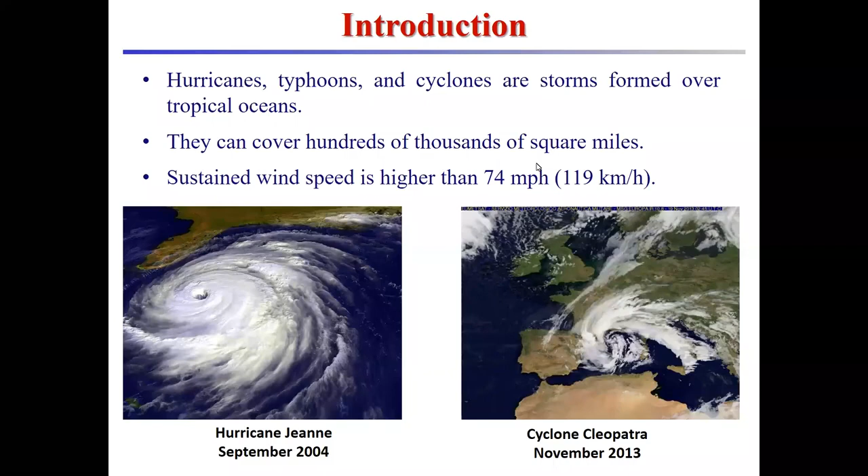Fundamentally, these are storms where the sustained wind speed is higher than 74 miles per hour or 119 kilometers per hour. How do these objects work? We really need to have warm ocean waters, in general with the temperature higher than 78 Fahrenheit, 26 Celsius. They need to be sufficiently north or south from the equator. They need to have a low vertical wind shear in the upper part of the atmosphere so that this cannot reduce the energy of the storm, and then some unstable conditions and a disturbance that will start the overall process.

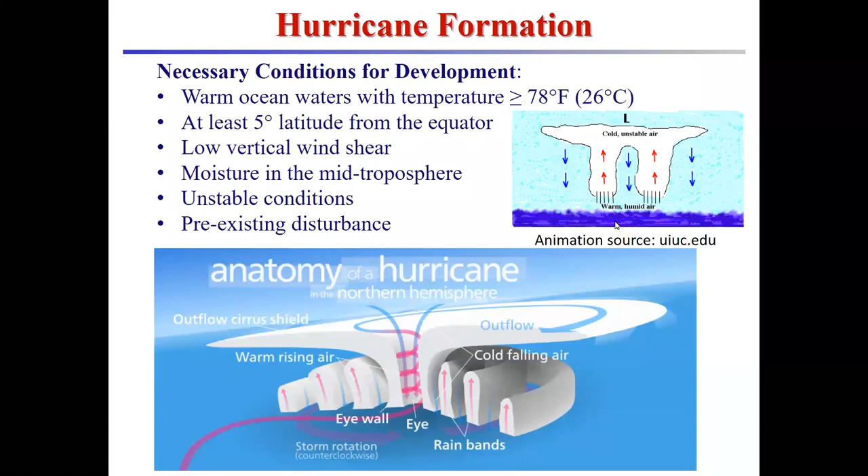Fundamentally, the warm air with high humidity is pulled up, produces the energy to generate the rotation, and then it produces, when it gets cold, comes down in terms of rain.

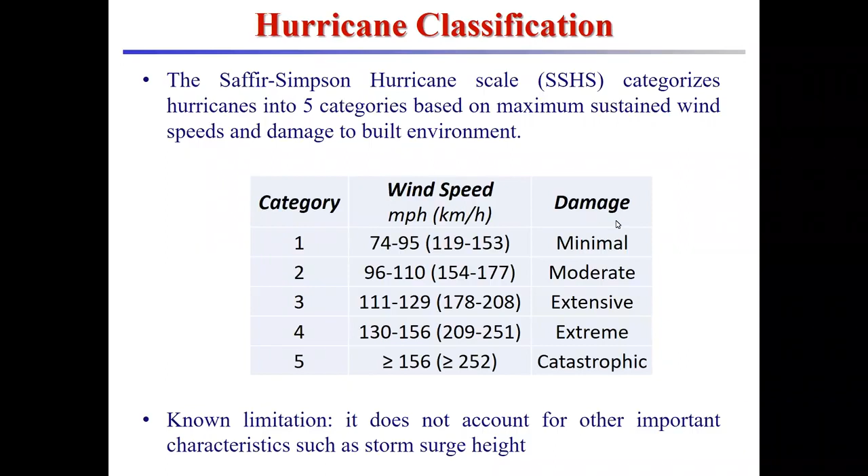The hurricanes are generally classified using the Saffir-Simpson hurricane scale that categorizes hurricanes into 5 categories based on the maximum sustained wind, from category 1 to category 5, where category 1 are, let's call it, milder cases of hurricanes, while category 5 are catastrophic hurricanes. Let me point out that there is a limitation in the usage of the Saffir-Simpson hurricane scale, in which it does not account for other important characteristics of the hurricanes, such as, for example, the storm surge or the production of rain, that are all things that can increase significantly the devastation produced by hurricanes.

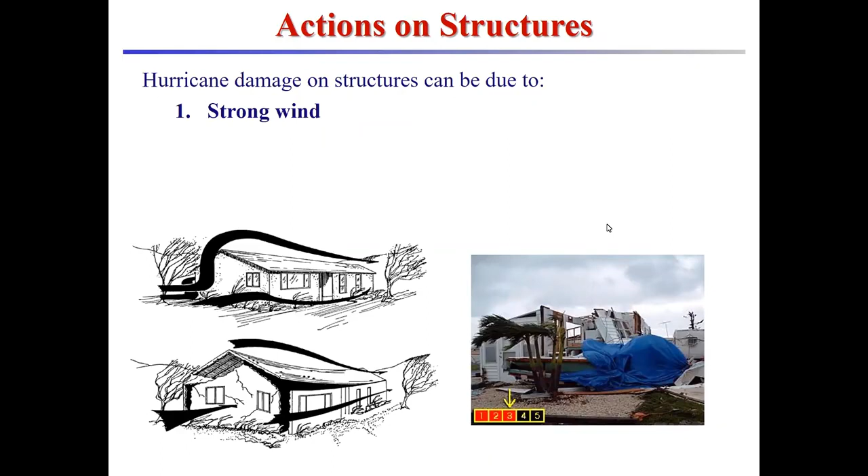So how do they act on structures? We are focusing on their effect on structures. Obviously, we have the effect of strong winds that produce pressure on the different surfaces of the different structures and can produce damage and collapse.

But we have also windborne debris impact. And windborne debris impact is particularly important not only for the localized damage due to these objects that are projected at high speed from the wind, but also because once the envelope of a building is breached, the load path inside the building completely changes. You have internal pressure build up, and we see very often houses that look like they exploded, and indeed this is exactly what is happening. They pretty much explode from the pressure produced inside, for which they were not designed.

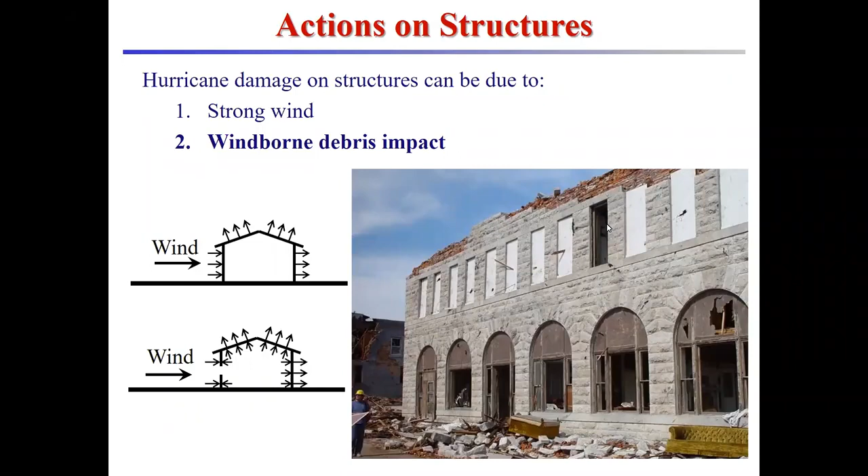Then we have storm surge and flooding. This is actually the major cause of death from hurricanes. Once the water is in a neighborhood, there is no way to escape, and it has unfortunately been known that when you have more than a few feet of water combined with the current and debris in the water, they are extremely dangerous.

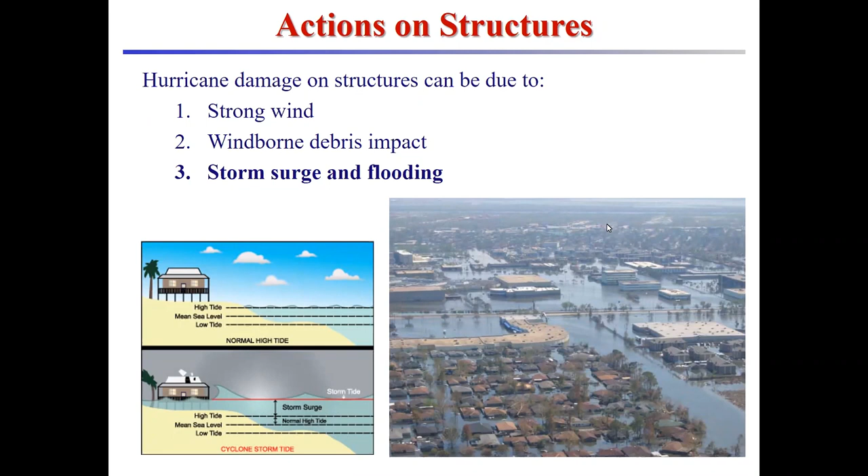They are extremely dangerous for the life of the occupants of the structures. Finally, we have rain. Rain usually produces flash flooding, but it also produces a lot of damage in the houses. Once the water is inside the house and the buildings, these buildings may actually require being torn down and rebuilt because they become unsanitary to be occupied.

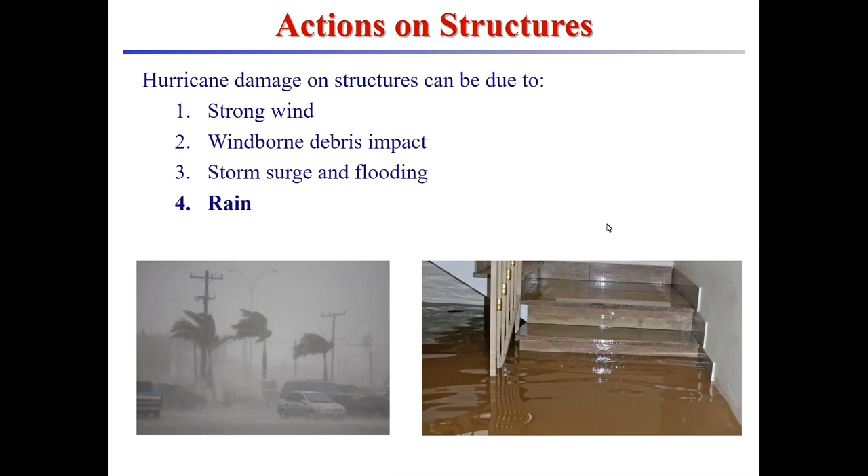So the idea of this research is to build on top of existing performance-based engineering approaches, and we have a series of examples of approaches that have been developed over the years. Obviously, performance-based earthquake engineering is probably the first one. It has more than 25, almost 30 years of history at this point, but there has also been development for performance-based blast engineering, performance-based fire engineering, performance-based wind engineering, and most recently, for example, ASCE SEI has developed a pre-standard for performance-based wind design, which will also be called in the next version of ASCE 7-22 that is being currently developed.

So performance-based engineering is a reality. It is a direction that our profession of structural engineers is undertaking and is most likely going to be here to stay.

So what are the motivation and the objective of my research in performance-based hurricane engineering? We have discussed already how hurricanes can cause significant economic and societal losses, and we need an approach that can consider, evaluate, assess, and mitigate these losses in a rational way. Performance-based engineering has been demonstrated to be such an approach.

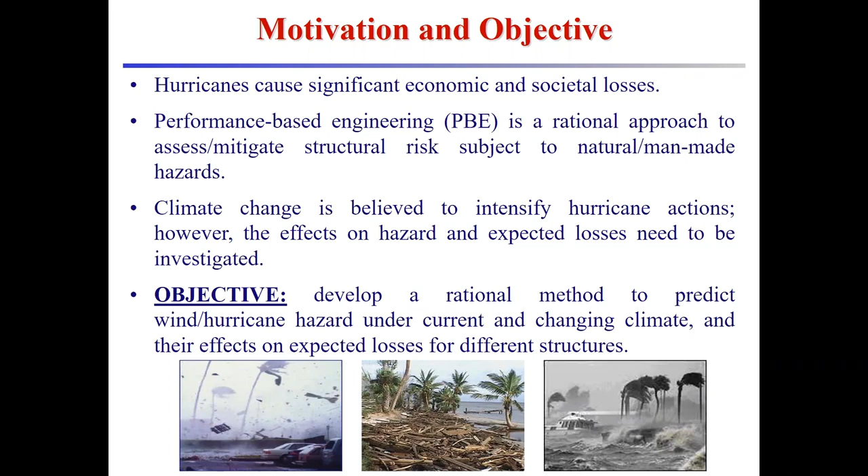In addition to that, we have deep uncertainty in terms of the effect of climate change. We know that one of the effects is to intensify hurricane actions. However, it is still existing research. There is a research interest in understanding these effects on the hazard and the expected losses in order to have some tools for mitigation. So performance-based hurricane engineering has been developed as a rational method for the prediction of wind and hurricane hazard under current and changing climate conditions, and to assess the effects on the expected losses for different types of structures.

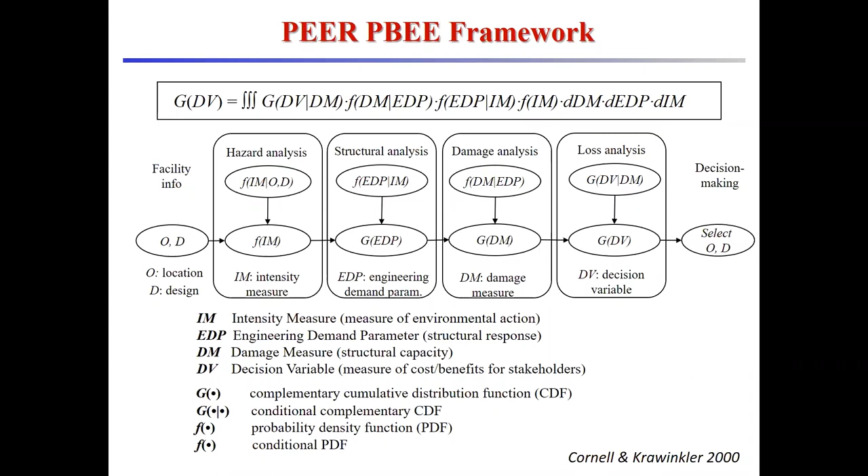In order to explain the performance-based hurricane engineering framework, I'm going to start with the well-known PEER performance-based earthquake engineering framework. This is really an application of the total probability theorem, where a divide-and-conquer approach is used: a difficult problem, the design of a structure considering the performance under different types of hazards, is broken down into smaller, more manageable problems. In the case of earthquake engineering, it is broken down into four different steps.

A hazard analysis step that investigates and describes probabilistically what the hazard is at the location where the structure is going to be built or is located. The structural analysis phase, which is the one us structural engineers are more familiar with, understanding the behavior of a structure once it is subjected to the different loads and effects coming from the hazard.

Damage analysis is also something we are very familiar with. It's finding the probabilistic relation between the damage level in the structure and its response under different loading. And then the loss analysis, which is a way of measuring the effects of this damage on the structure, quantifying them in a way that can then be used for decision making.

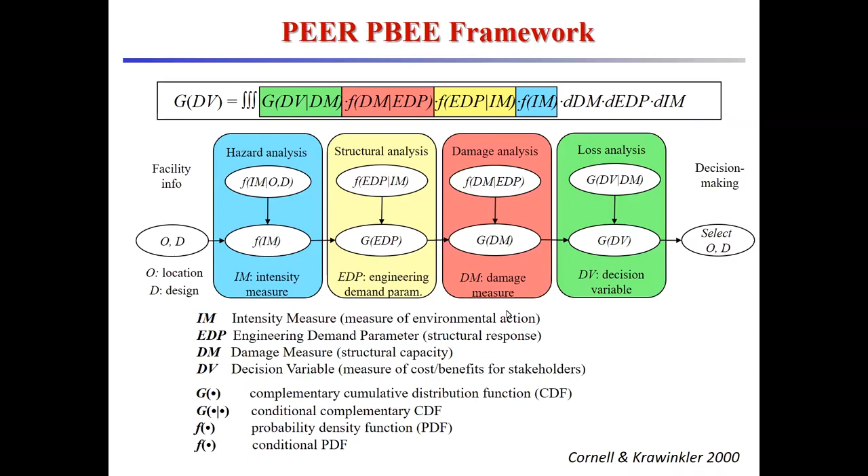So what is new in the performance-based hurricane engineering framework? The methodology is also based on the total probability theorem. It is useful to divide and conquer this problem too. However, hurricanes are a little different than earthquakes because they really need to be represented as multi-hazard scenarios. You have the wind, you have storm surge, you have rain, you have windborne debris. These are all correlated, happening at the same time, but depending on different parameters. So based on what has already been developed in performance-based wind engineering, we moved from the performance-based wind engineering framework to the performance-based hurricane engineering framework by introducing these multi-hazard considerations.

Particularly for the performance-based hurricane engineering framework, we are considering hazards that are synchronous because they're happening all at the same time. This also includes the effect of cascading hazards, in the sense that a hazard producing an effect on the structure can change, affect, or trigger other hazards that can be exacerbated or modified by the changes in the structure.

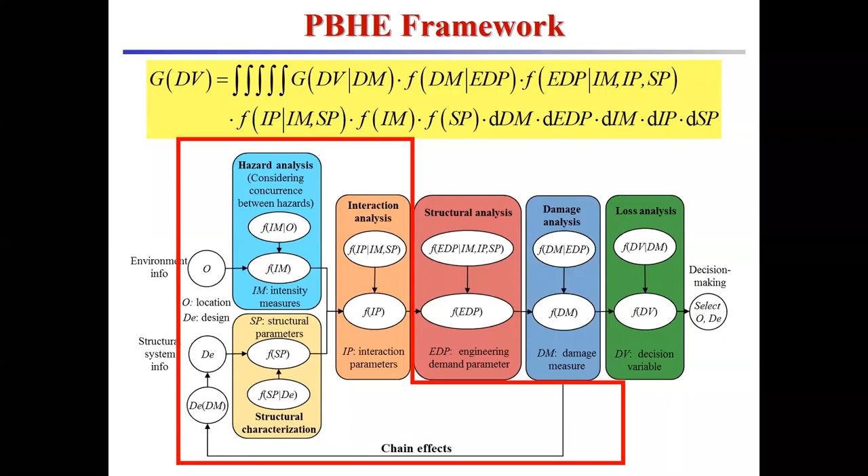And so building on this, it is possible to implement the framework in many different ways. The way that will be presented here, or the results that I'm going to present in this talk, are based on a multi-layer Monte Carlo simulation approach.

This specific implementation allows us to break down each of the steps of the analysis into two sub-steps. A stochastic simulation step where we are sampling the random parameters that describe each of the different analysis components. And then an analysis step that is based on deterministic models, hazard models, finite element structural models, cost models that are used to produce the uncertainties and propagate them from one component to the next of our analysis.

Notice that in this process, for this simulation approach, we start by simulating the number of hurricanes per year because we are trying to generate a loss curve, an annual loss curve. In the case in which our simulation produces 0 hurricanes in a given year, the analysis still runs with a non-hurricane wind at the location of interest. Thus, this methodology reduces to performance-based wind engineering as soon as you have 0 hurricanes happening in a given year.

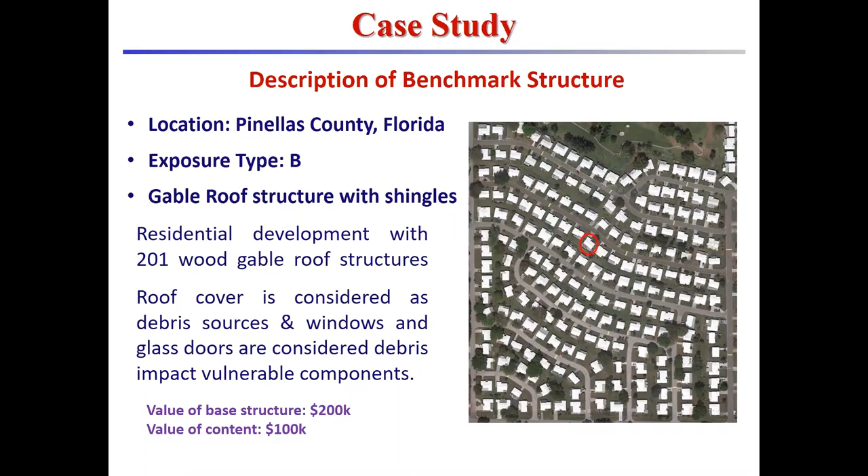$200,000. The value of the content was assumed to be half of it, and so we are going to have this baseline as our costs. Geometrically, this is the unfolded view of the target building.

We are considering the geometric parameters as deterministic, as we can measure those. And this is the location where the house is positioned geographically.

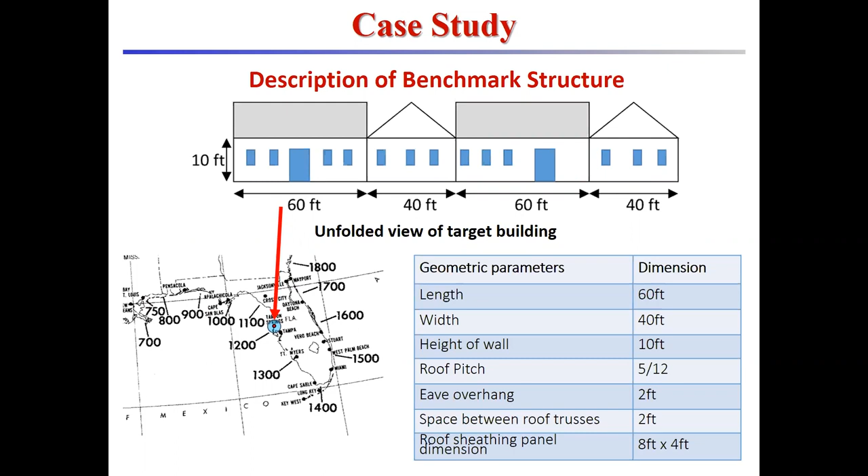We go now through the entire process of our simulation. We start with the hazard analysis. We have to model, obviously, the wind velocity for the pressure, and then the house is sufficiently far away from water bodies so that we don't have to worry about flooding.

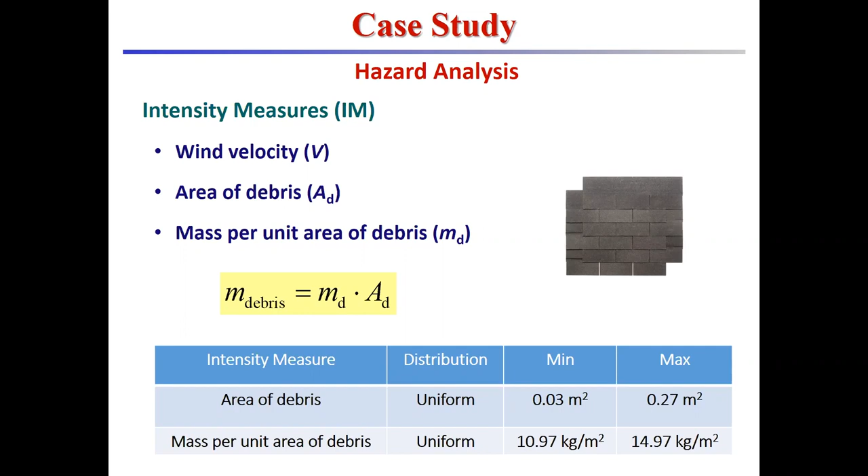We need to focus mainly on wind, pressure, windborne debris, and the rain that can enter from these effects. We model the wind velocity at the location, and we model the possible windborne debris, mainly produced by the surrounding buildings. There is some vegetation at the location, but we are neglecting it in this particular application.

So all of the windborne debris are produced by the other surrounding structures. We represent the characteristics of the structure that change the load, and these parameters depend on the geometry, the orientation of the house with respect to the wind, and the location of the different portions. We found from the literature the probabilistic description of the pressure coefficients, external and internal, under enclosed breached conditions, and under different directions of the wind.

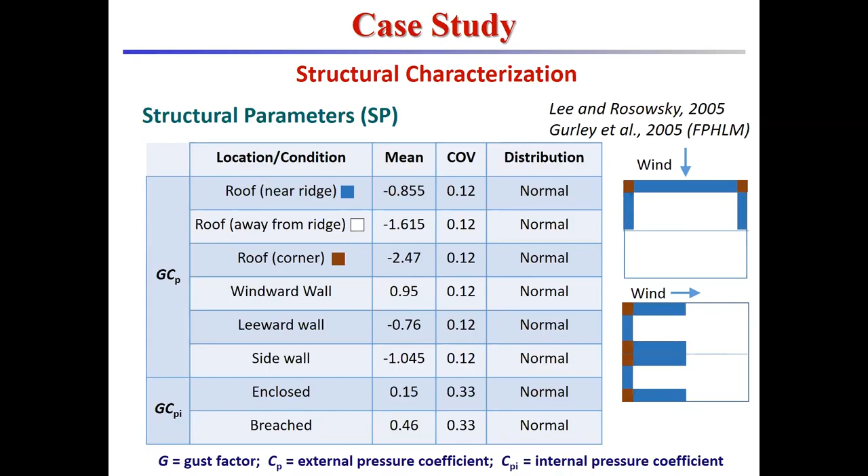We evaluate the interaction parameters for windborne debris, considering two different interaction parameters: the linear momentum and the kinetic energy of impact. This is because other research, including ours, demonstrated that linear momentum controls the behavior of elements that are brittle, whereas energy of impact controls the behavior of ductile elements such as storm panels and other protective systems.

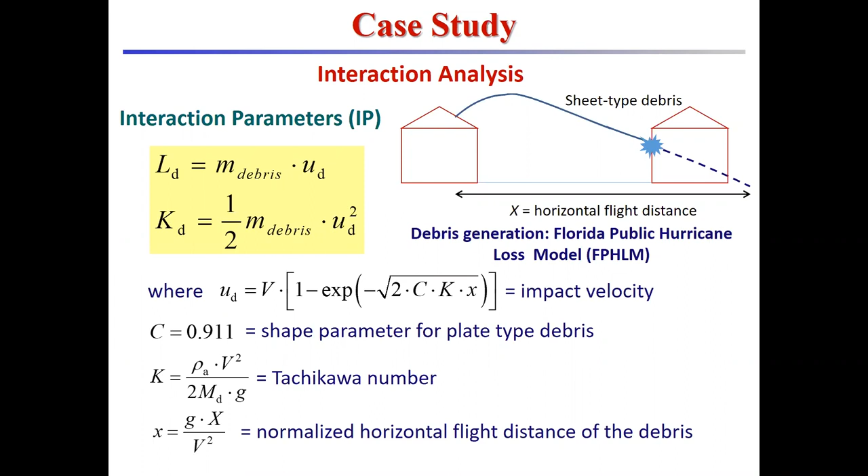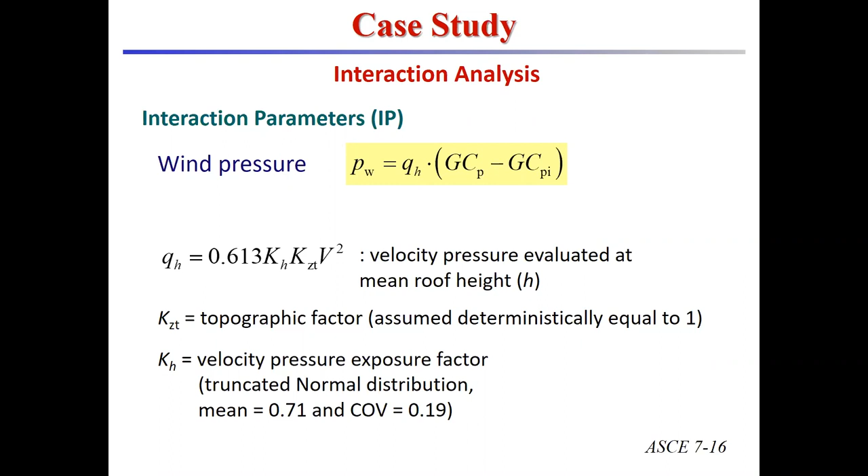We used an existing debris generation model and flight description model for debris. We also need the pressure applied on the different surfaces. This is the equation for wind pressure on structural components and cladding used in ASCE 7-16, with the difference that all of the parameters appearing there are now random parameters that are sampled during the simulation to provide the actual numerical value.

Then we have the structural analysis and damage analysis component. For this type of structure, we are not really doing a finite element model. We are comparing the load applied, or our interaction parameters, with the strength properties of the different components that are available in the literature.

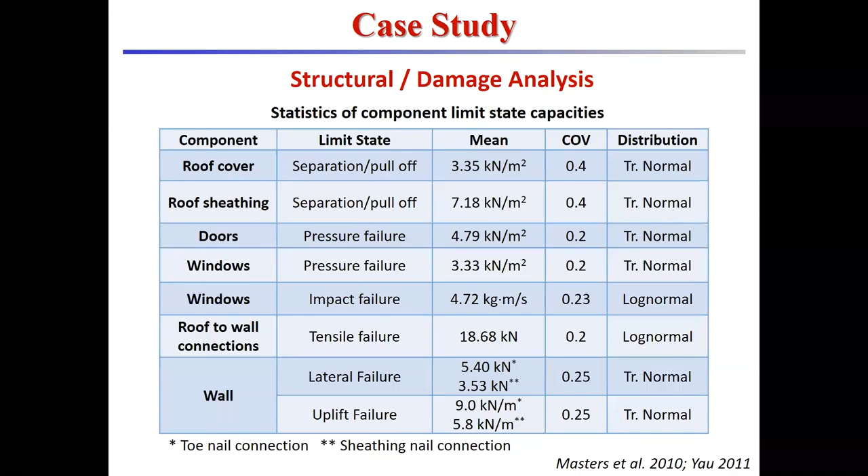Finally, we can put all of these ingredients into a probabilistic cost model and obtain an annual probability of exceedance curve, which expresses the probability of exceeding a certain cost of repair over a given year for the structure.

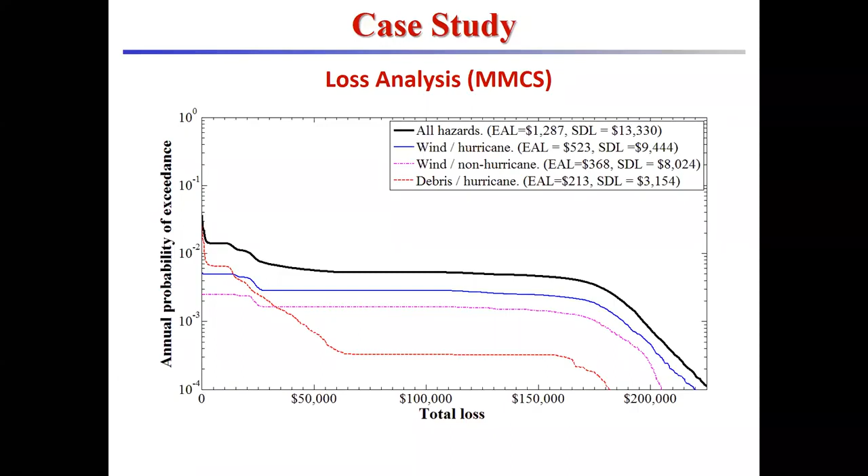We used this data for an extra step to help in the decision analysis. We considered 4 different possible retrofit or design solutions: the addition of aluminum hurricane protection panels, the substitution of shingles with clay tiles, and changing the roof sheathing nailing patterns, for which we considered 3 different nailing patterns, and then a drastic change from a wood structure to a masonry wall structure.

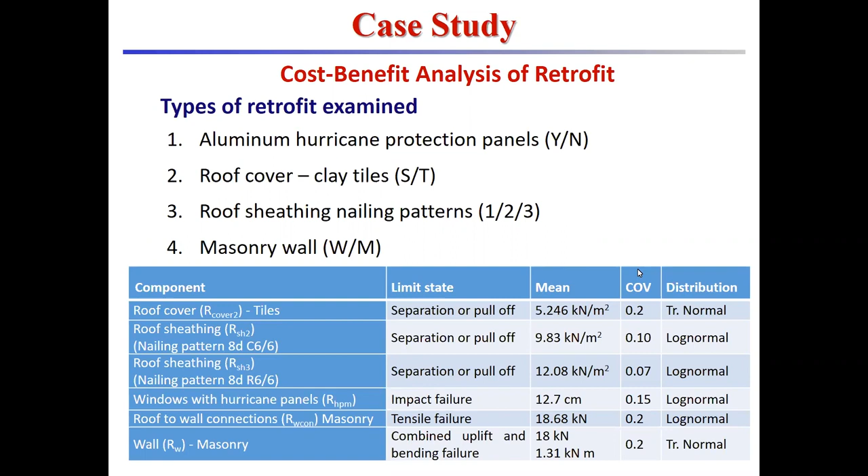If you combine all of these conditions, you have 24 different possible combinations of mitigation strategies. In order to compare them, we introduced a cost-benefit analysis of the retrofit, where the benefit is given by the summation of the difference in expected annual losses between the house as it is and the retrofitted house, with a discounting rate assumed equal to 3% over a design life of 30 years. Then to get the benefit, we subtract the cost of retrofit at present time.

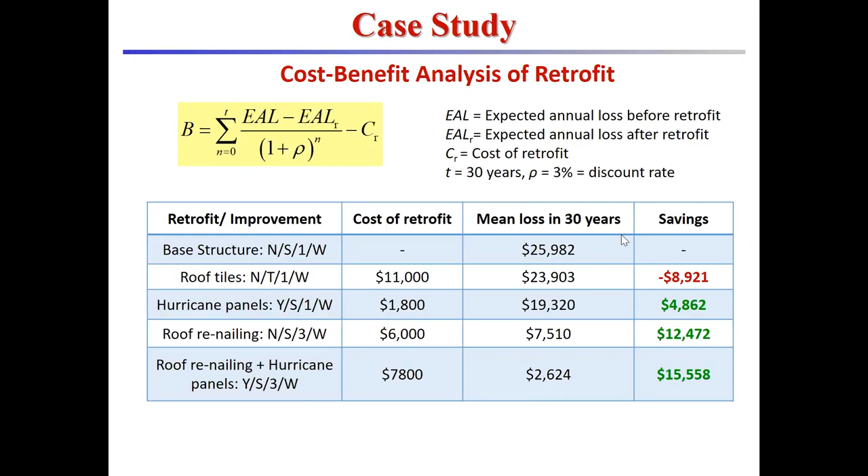The first case is our baseline house with no mitigation.

We see that changing the nailing patterns in the roof sheeting is actually very effective in terms of gaining savings. The usage of tiles is actually not very beneficial here. The cost of using tiles is really not justified in terms of the reduction of losses. Storm panels are also very effective and very cheap in reducing your losses, and thus produce a significant benefit.

For this specific location and this specific residential development, using a masonry structure is not justified in terms of costs and savings, which was actually a very nice discovery when I did it, because when I was building my own house in Louisiana, I was wondering if I should have done it in masonry, but I was refrained by the costs. Indeed, it was nice to have my research show that the choice was actually a rational one. So that's really a way of deciding what to do with this house.

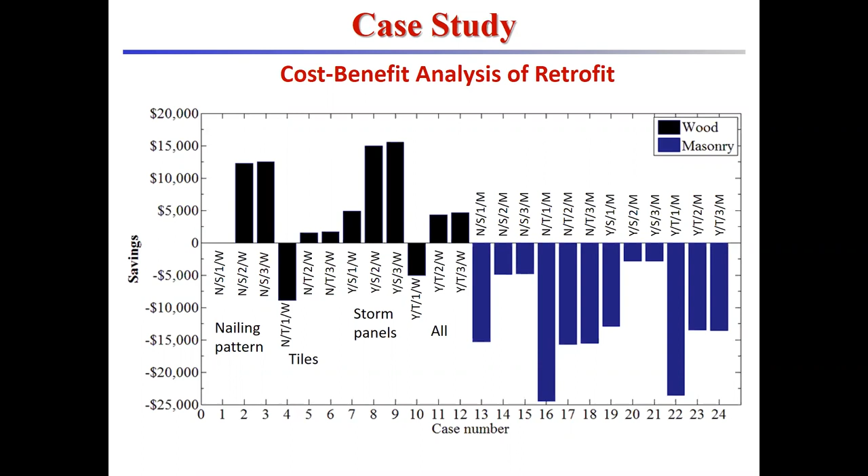What changes when we include the effect of climate change? Because we are considering now structures that have to live, by our assumption, at least 30 years or more. So let's do this further analysis.

We start by trying to model these climate change effects on the hurricane hazard. We see that the global sea surface temperature has increased significantly in the last 100 years, and hurricane intensity has also increased in the same period. This makes sense because it's the high temperature in the water, the warm moisture, that produces the energy needed to move the hurricane. Research has shown that the peak wind speed of hurricanes increases between 5 and 10% for each Celsius of increase in the tropical ocean temperature.

Another thing that is scary in a certain way is that not only is the hazard increasing, but also the vulnerability of the US and the world is increasing. This is because the number of people moving and living along the coasts, where vulnerability to hurricanes is obviously higher, is also steadily increasing. So our risk is increasing because the hazard is increasing, but also because the vulnerability is increasing.

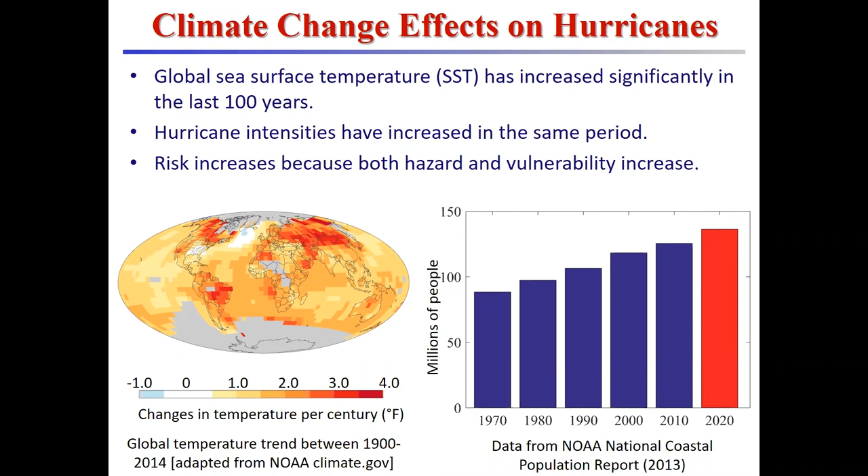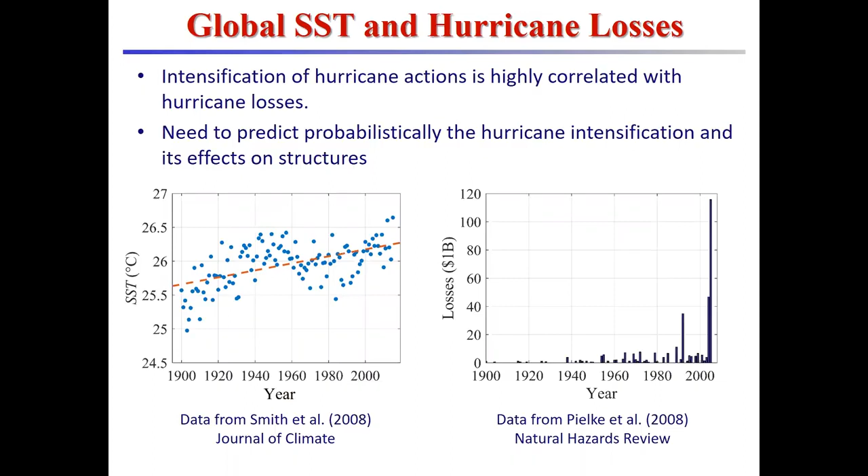Now let's try to obtain a model that can allow us to describe the effect of climate change within a performance-based hurricane engineering approach. We see that the intensification of the hurricane actions is highly correlated with the losses, and we need to predict the probabilistic hurricane intensification due to the probabilistic and measured increase in temperature that we have for climate change.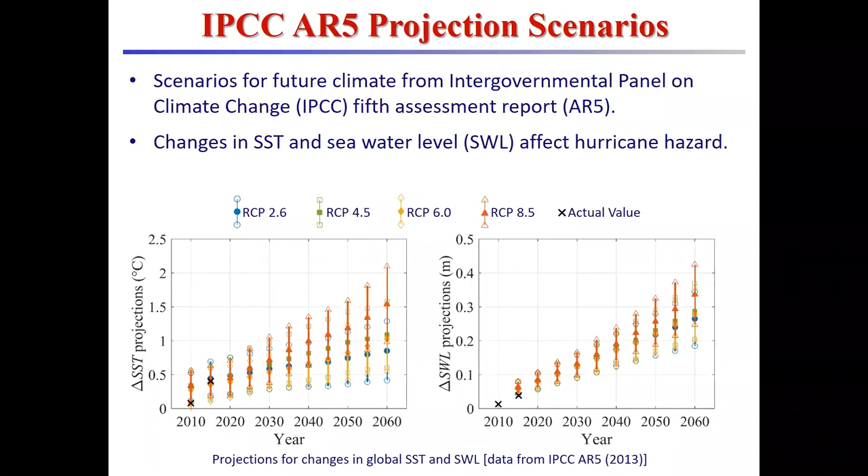So we investigated statistically what is happening in the Gulf Coast and the Atlantic coast of the United States. What we found is that the number of hurricanes per year doesn't change a lot, in terms of years or in terms of the average annual temperature measured during different years. What changes is really the intensity of the hurricane.

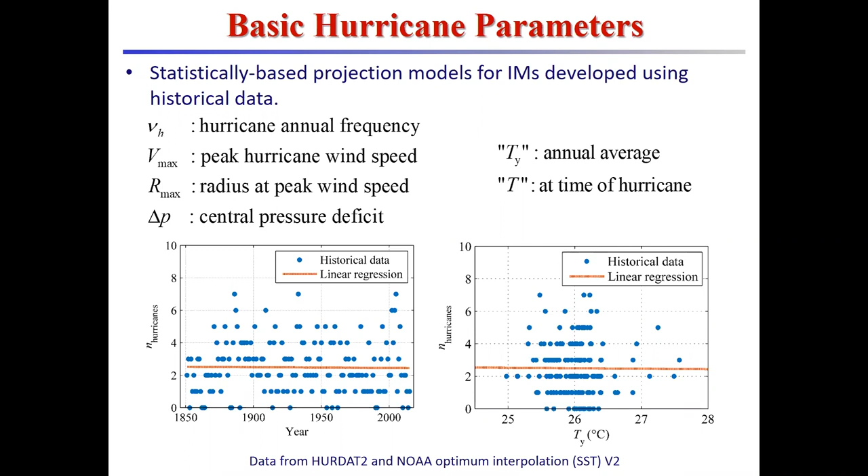So we tried to develop a model to represent the description of these changes in intensity with the changes in temperature. The data that we have, unless we want to go into detailed models of meteorology and changes in climate, are the changes in annual average temperature. And we try to develop a statistics-based model based on linear regression of historical data that relates the temperature at the time and location of a hurricane with the annual temperature of a given year.

Once we have these, we can generate similar linear regressions that produce a relationship between the mean and the standard deviation of the intensity measures we've identified as most important to represent hurricane intensity: the peak wind speed over the profile, the distance from the center of the hurricane at peak wind speed, and the translational speed of the hurricane.

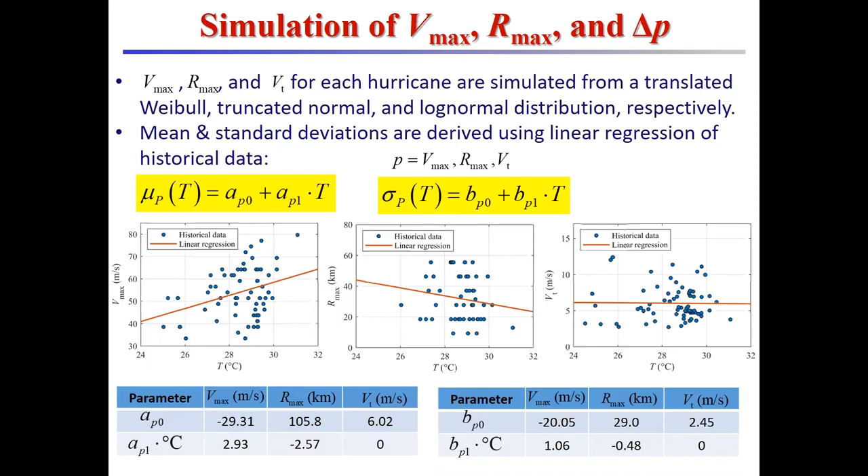Here are the results of our statistical analysis, using information representing the effects of hurricanes along the Atlantic coast and the Gulf Coast. We considered 27 mile posts at 100 nautical miles along the entire coast.

Based on statistical data, we described for each location a distribution of the distance from the center of the hurricane to the location of interest, a radius of influence beyond which the hurricane doesn't really change the risk, the wind speed distribution at the location, and the frequency of hurricanes, which in this application has been modeled as constant until better data is available to demonstrate otherwise.

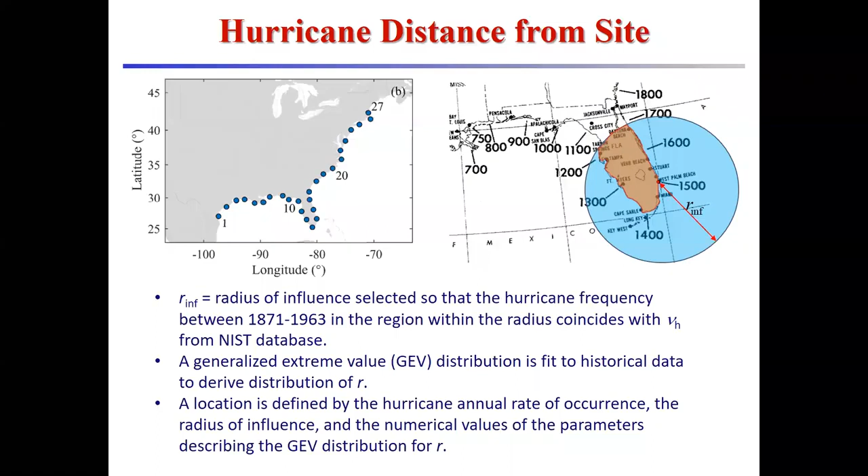Based on this information, we introduced a wind speed profile model. This is actually a model published in 2005 by Willoughby—a less known model. Usually the model that's used is the Holland model, the Holland formula. However, the Willoughby model provides a larger number of parameters to work with and a better description of the profile of the hurricane, particularly far from the eye.

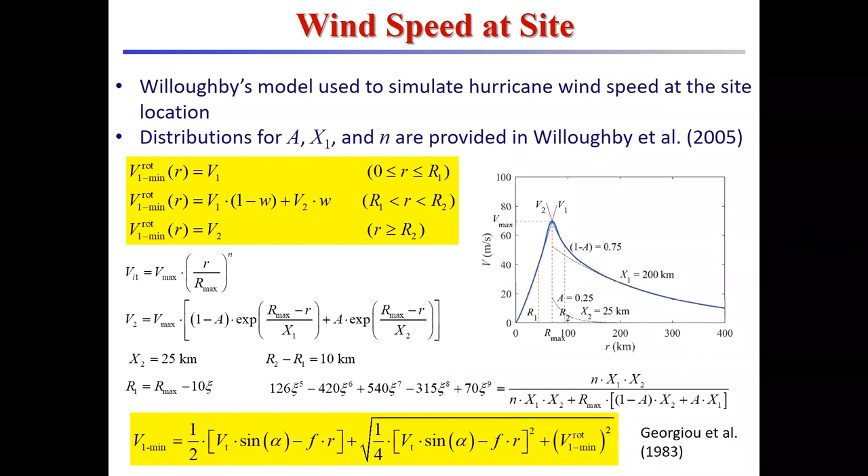I'm not going to get into the mathematics of this, but the profile model describes the rotational component of the hurricane, which is then combined vectorially with the translational component of the wind speed through the Georgiou model, shown at the bottom of this page. Now we have a model that produces a wind speed at a given location.

Let's see how it works in terms of representing historical data, and also for projecting wind speeds. The first comparison is done with historical NIST data to see how we capture the body of the wind speed distribution. As you can see, we have a model that produces very good results in terms of mean wind speed, and it's still acceptable for the standard deviation at different locations.

It's not as sensitive to different geographical characteristics. However, if you look at the average error between historical data and what our model produces, we have errors in terms of mean and standard deviation that, averaged over the 27 locations, are way smaller than 1%. So we were very satisfied with this model.

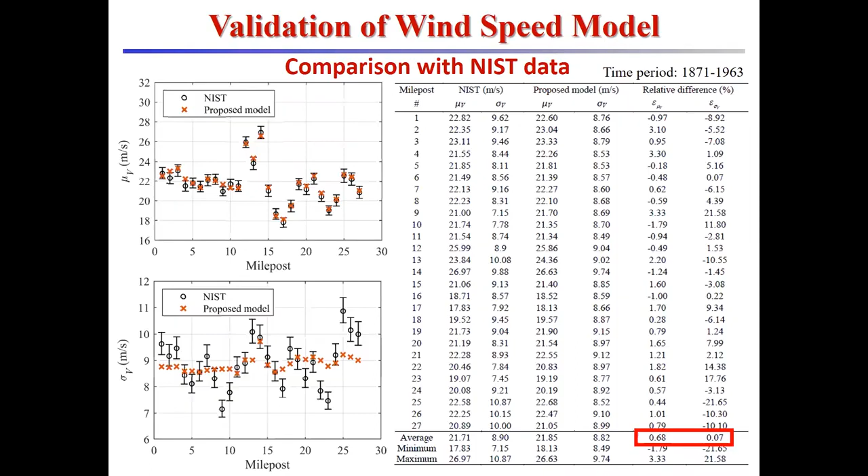Now we also want to see how this model works on the tail of the distribution, because if we're designing structures, we're more interested in the tail than just the body of the wind speed distribution. This is a comparison of our model with the design wind speed provided by ASCE 7-16 at the different locations for 300, 700, 1700, and 3000 year return periods—the wind speeds used for design of category 1 through 4 structures in ASCE 7.

So they represent the tail of the distribution. Again, when we look at the relative difference calculated over the 27 locations, we have differences that are always smaller than 1%, and the maximum error or difference we find in our estimate of these wind speeds with respect to the historical data is always smaller than or equal to 10%.

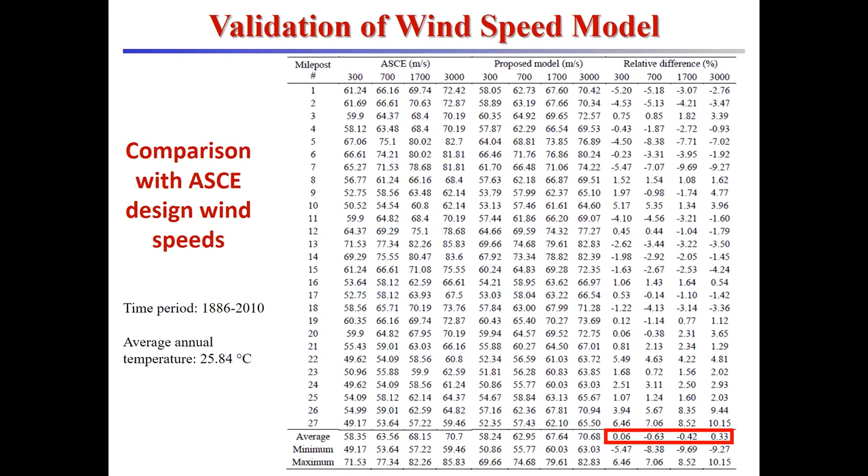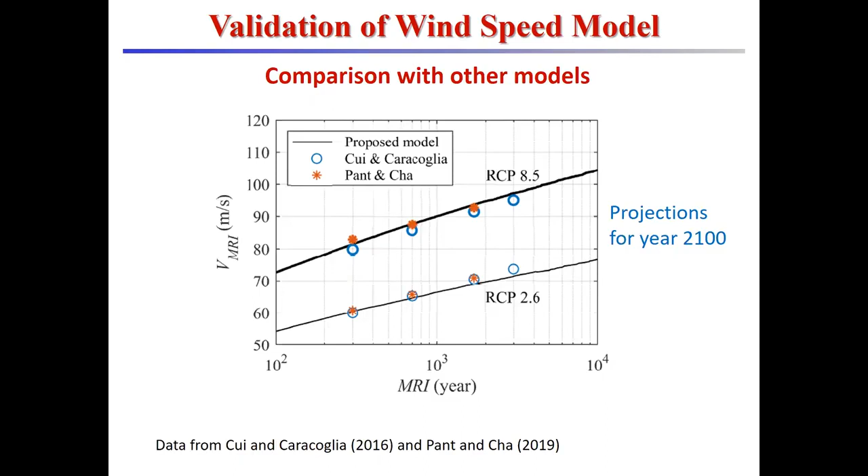You can see that the differences are really small from an engineering point of view. So our model is at least as accurate as very complex and computationally expensive models that produce this data using a complete track of the hurricanes. We are obviously very satisfied with our model.

Now we want to see what this change in wind speed produces from a point of view of the effect on the houses. So first of all, we measured our change of mean wind speed and standard deviation of wind speed.

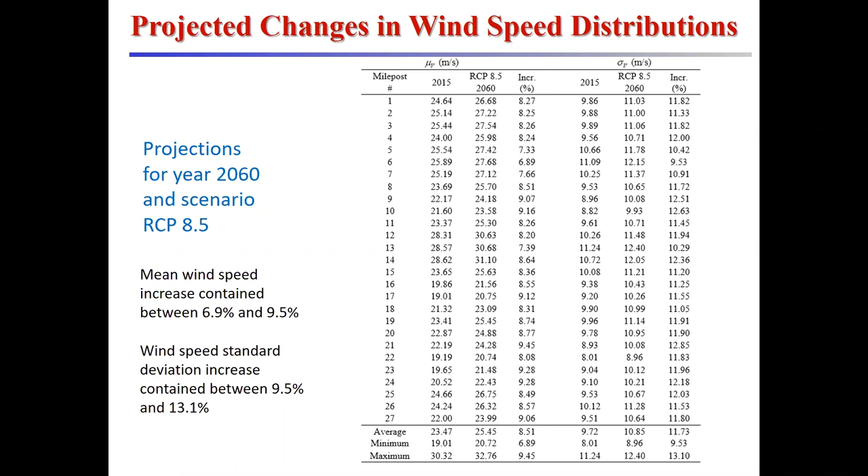These are projections for the year 2060 with the scenario RCP 8.5, which is the worst case scenario. We see that the increase in mean wind speed is somewhere between 6.9 and 9.5% over the 27 locations in these 45 years of time. The standard deviation is increasing more, and that is expected because we have more uncertainties in predicting future wind speeds than current or historical wind speeds.

But then we look at the changes in the design wind speed, again for 300, 700, 1700, 3000 years. Here things start getting a little bit more scary, because the design wind speeds are increasing between 12.4 and 39.7%, and since wind loads are proportional to the second power of wind speed, we are really talking about an increase in design wind loads contained between 26.3 and 95.2%. So we are almost doubling the design wind load for some locations and some structures.

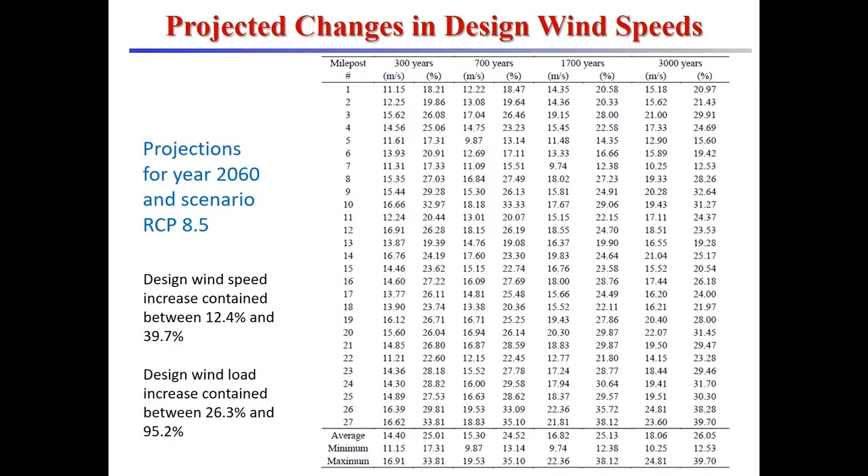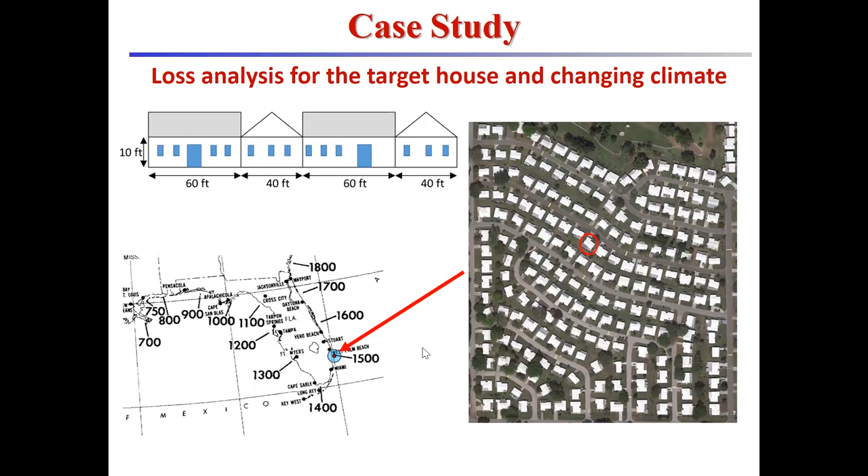So what happens when we take the same house we analyzed before? Now we are moving it here, north of Miami. We were looking for a place with a little bit higher wind speed to really see the effects of this. We go through the same process as before, without considering climate change and then considering climate change with the worst case scenario. We are considering the effect between 2015 and 2060.

And you can see that in the first case, you have similar results to what we had before. Again, the nailing pattern works well, storm panels work well, masonry is too expensive. However, when you consider climate change, something that now would look too expensive becomes actually feasible and reasonable in terms of expenses and cost benefits.

And here you can extrapolate from these results the effect globally of these losses. When you multiply this by the number of houses, the locations, and the years, we are talking about a lot of billions of extra losses that are going to happen if we don't do something to retrofit our houses and our buildings.

And with this, I think my time is close to the end. So, some conclusions. We have developed a performance-based hurricane engineering framework that is based on the total probability theorem and uses knowledge already developed in other civil engineering subfields like earthquake engineering and fire engineering. However, performance-based hurricane engineering is the first framework for real multi-hazard performance-based engineering.

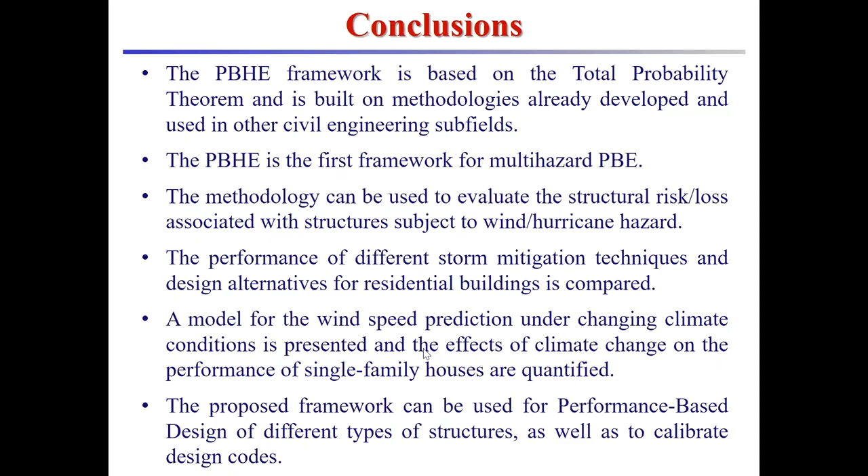However, the performance framework can be used for other types of structures. I've not presented other structures due to time limitations, but we have some examples on tall buildings that have already been developed. So it can also be used to calibrate design codes, particularly if we want to include the deep uncertainties associated with the effect of climate change in the future.

With this conclusion, I would also like to acknowledge the funding agencies that paid for this research, and also my collaborators, Dr. Petrini and Dr. Ciampoli — Ciampoli, unfortunately, passed away a few years ago — and then my students, Dr. Unnikrishnan, who has already graduated, and Mr. Esmaili, who is still working with me, getting close to finishing, and really focusing on the climate change analysis and efforts.